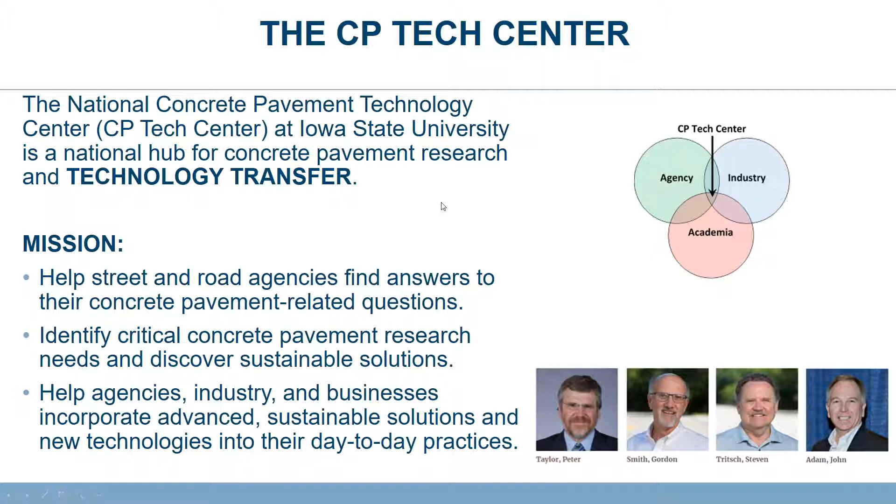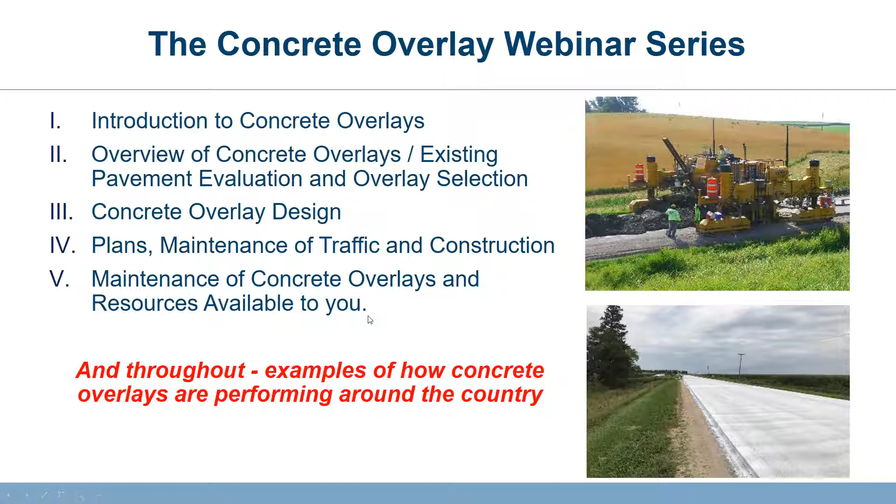Today, Dr. Taylor and Dan King will join us to present an introduction to concrete overlays and an Iowa overlay story that illustrates one instance of expanding use of concrete for pavement rehabilitation or resurfacing needs throughout our nation. In the coming weeks, we will cover an overview of concrete overlays and the information needed to evaluate and select an overlay. We'll talk about concrete overlay design, plans, maintenance of traffic, and construction. And finally, in our last session, we'll focus a bit on maintenance of concrete overlays and cover some of the resources that are available to you. Throughout the webinars, we'll be offering examples of how concrete overlays are performing around the country.

The pavement system in the US was constructed, but the bulk of it was constructed and set up many years ago, and it is getting tired. Some of it's pretty old, some of it's pretty beat up. Budgets for maintenance have been very limited for the last few years.

As we're starting to think about asset management, we're starting to realize that if we let the condition of a pavement fall too far towards the floor, the actual cost of restoring it to some sort of usable state can get very expensive very fast.

Think about the vehicle you drive. Why is it that rental companies dispose of their cars after 30,000 miles? It's because the maintenance costs start to get too heavy. In my own vehicle, it's more cost effective to spend money on it and keep it in good condition rather than let it get to be really bad.

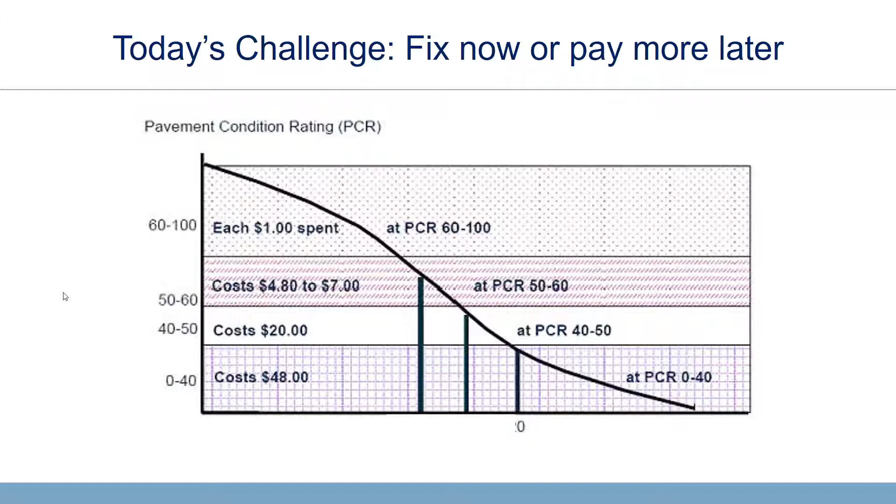So as we think about how to maintain and restore the condition of our pavement infrastructure system, we have a number of options. Our roads are getting old. We can toss them out and start again.

In some ways, this is what we do with a lot of aspects of our lives. In a plastic, disposable community or culture, it's part of the way we think about a lot of stuff. But does that make sense when we're looking at pavements?

The benefit of this approach is that it's a long-term solution. We've got 30, 40 years out of the existing system. Toss it out, throw it away, put in a new one, and we'll get another 30, 40 years.

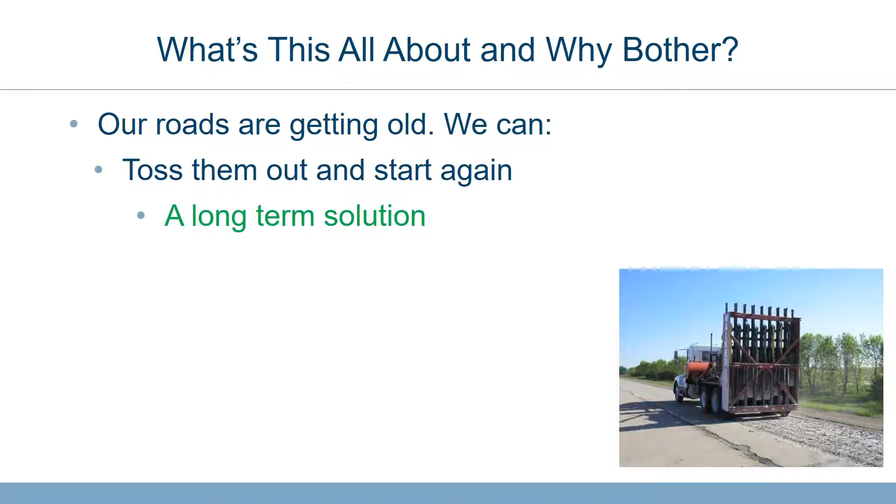But there are some fairly significant negatives. What do we do with all of that material? If you think of the quantities of concrete, asphalt, rock, sand, foundation material, the volumes are huge.

It's also not very sustainable. It burns a lot of energy, a lot of diesel, a lot of carbon dioxide footprint to pick them up, break them up, get them out of the way. And again, then we still have the carbon footprint of putting the new system back down.

This also takes time. It's probably the longest and slowest approach to doing any form of rehabilitation. The photograph is actually taken from a stretch of highway near where we live right now.

And it was on the road that we used to go on at least once every month, heading up to visit my daughter in college. We spent months beating up the old road, digging it out, getting it out of the way. The system was shut down, basically, or constricted for months as we went through the whole process.

And so the social impacts are huge. The environmental impacts are huge. The costs are huge. So in terms of sustainability metrics, this is probably not the best approach that we can take.

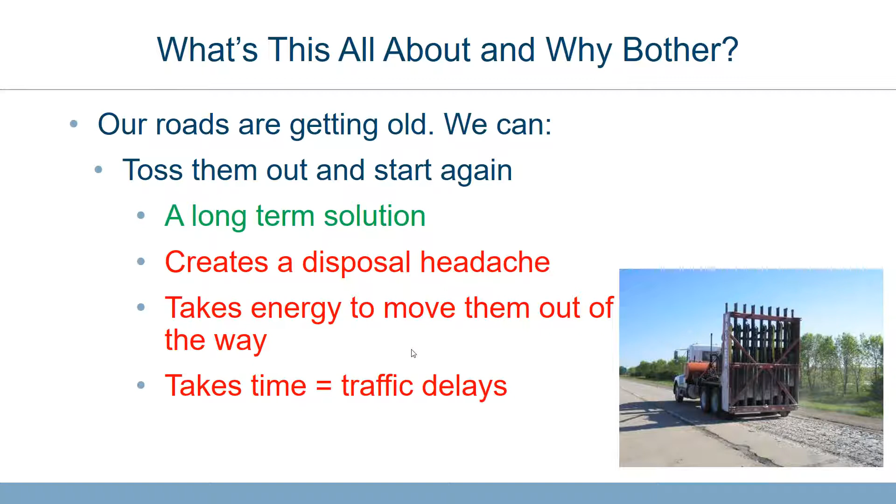So the next alternative that we can think about is patch them, slap a bandage on them, and do something quick and dirty. Now the benefit of this is that it's very little amount of material, energy and traffic impact is low. You can get in, do it overnight or over a day or two, and get back out.

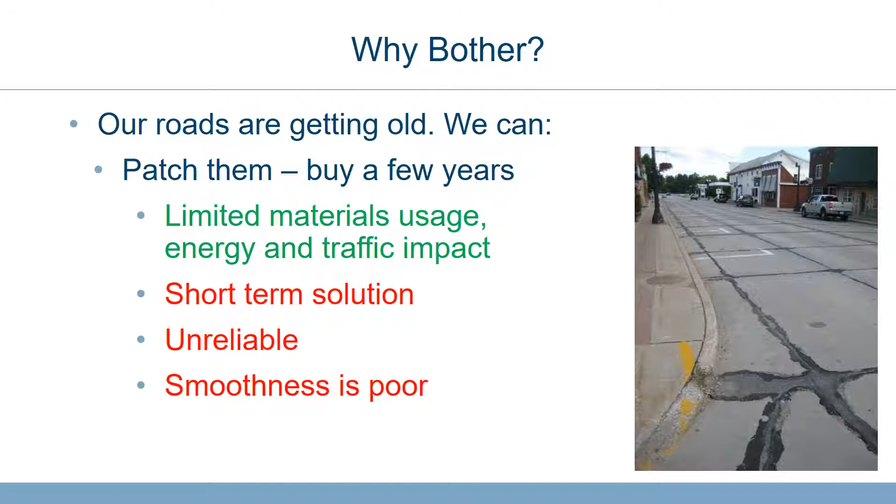The negatives: it's a short-term solution, it doesn't last very long. It's pretty unreliable. Smoothness is poor, aesthetics is poor. So again, there is some positive, but there are also a lot of fairly significant negatives.

So the third alternative we can think about, and the one we're going to spend the rest of today looking at, is the idea of an overlay: put another layer on top of the existing system.

The benefit of this is that the equity that we have in the system that's on the ground, we keep. It doesn't get disposed of. It's not wasted or thrown away. We're taking full advantage of that system regardless of its condition, and I'll talk about that in the next few slides.

This seems to be the best way of maximizing our sustainability benefits, in that we're putting down as little material as we needed. We're not throwing away much material. The other benefit of this approach is that we can actually design it to deliver whatever lifetime we want out of it.

If it's just a case of buying a couple of years until the next planned maintenance cycle or next replacement cycle is budgeted, we can design and deliver a system that's going to last 5 years and probably not much more. The alternative is this: if we want this to be a long-term system, we can also do that, and we can make it serve for another 20, 30, 40 years as needed.

The downside of this is that in urban environments, the elevations, connections, sidewalks, manholes, bridge clearance - those can be a little tricky, and so we do have to stop and think about these a little bit. When we're out in the middle of an Iowa cornfield, this is really easy. But if you're in an urban setting, this does become a little bit more of a challenge.

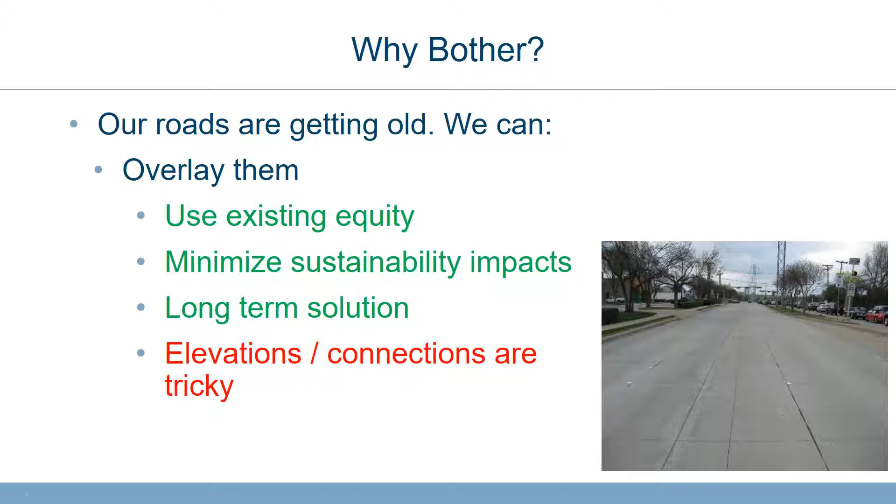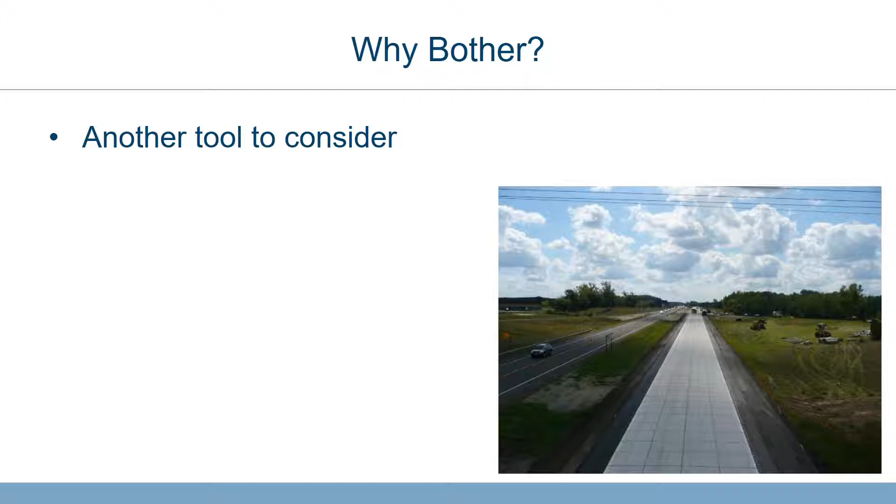However, this has been thought through. We do have suggestions on how to address this, and I'll touch on these today and go into more detail on them in 3 or 4 weeks' time. So the message we're really just trying to put out there is that there are occasions when overlays may not be ideal, but for the agencies in the audience, this is just another tool in your toolbox for you to consider as you look at your maintenance issues going into the future.

So how do we classify overlays? This is a topic that's still evolving. There is a lot of debate. There's been a flurry of emails circulating among those of us involved in the community over the last couple of days about how do we stop and think about and design overlays and the different systems that we may want to choose to do.

The first question, as an agency, is to ask yourself: well, what's already there? Is it asphalt or concrete or a composite? That's pretty easy to answer - go outside and kick it. And that's your first sort of bifurcation point in your decision tree.

The next question is to ask: is that existing pavement in reasonably good condition? Are we doing this in order to just elevate it a little bit? Are we trying to improve traffic access? Are we trying to do a little bit of widening? If the system is in pretty good condition, that's a different approach than if the system is badly beat up and is looking pretty sad.

Now, generally, the way that we're approaching this is that pavements that are in pretty good condition, you can consider a bonded overlay, meaning a system that is glued to the existing pavement. An unbonded system goes on top of systems that are in pretty sad shape. The difference then is that in a bonded system, the old pavement becomes part of the structure. In an unbonded system, the old pavement is part of the foundation. And that has implications on the way that we design them.

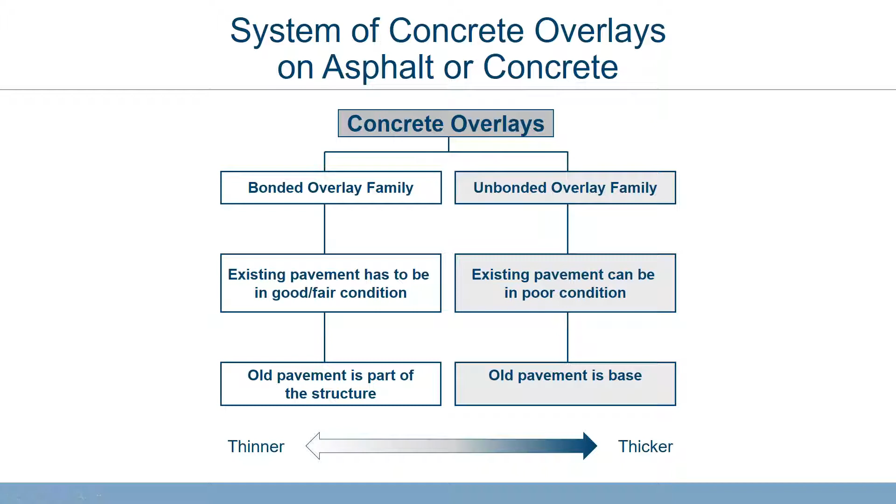Now, it's a pretty simple way to think about it when we talk about concrete on concrete. It is a little bit blurry when we start talking about putting concrete on top of asphalt. Now, the fundamental science behind this decision process is that if you have two different systems, two different layers, stressing - one that is not bonded to the one below can end up with fairly high stresses both at the bottom and the top, if we treat it as an elastic system sitting on a flexible medium. There is no connection between the stresses between the two, there is no shear between the two.

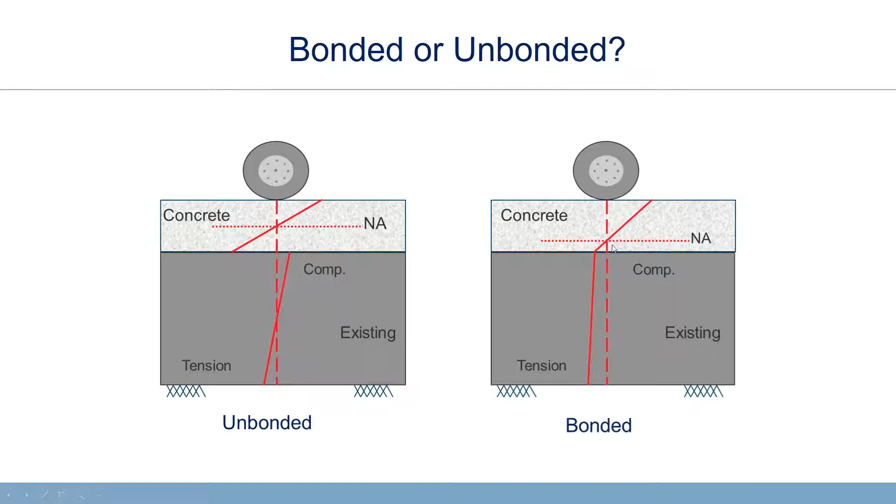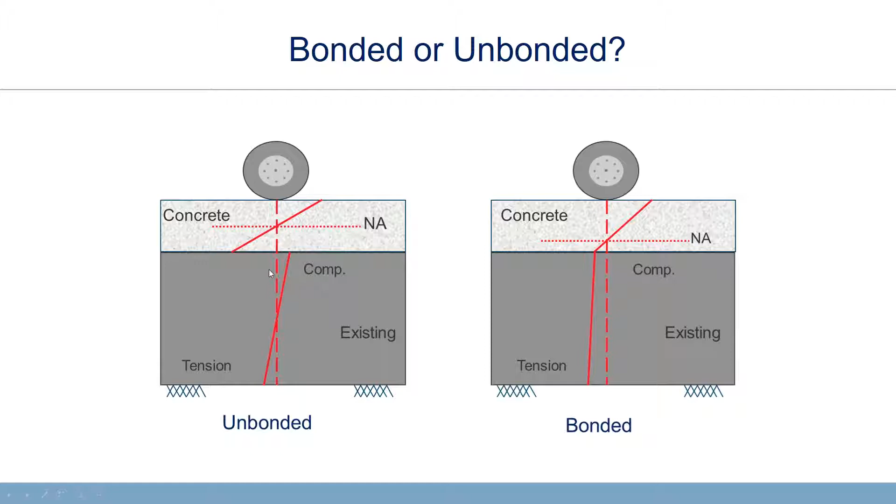Now, if we put a bond in between so that these two systems are working together, you can see that the stresses are actually reduced and some of the load is transferred into the existing system. That means fundamentally we can reduce the thickness of this concrete overlay. So there is an implication - are we putting it on good stuff or on bad stuff - does affect how thick the layer has to be, or how thick that new layer has to be.

The other thing that we have to think about then, whether it's bonded or unbonded, is what do we do about the interface between the two layers? If we're doing an unbonded system, that new layer must not bond to the existing concrete. And the reason we get excited about that is that generally any cracks or joints that are in the existing system will reflect through into the new layer unless you can provide a separation. Again, unbonded systems tend to be put down on poor condition and are slightly thicker.

Now, when it comes to asphalt, some bonding is okay - we don't take any special activities to try and separate the two layers. So some bonding, this is where I said it becomes a little blurry in these definitions, but this is still as good a way of approaching or classifying these systems as any we have at the moment. On a bonded system, again, because we're decidedly or deliberately depending on the load carrying capacity of the existing system, that bond has to be there - we have to be able to transfer shear between the two layers.

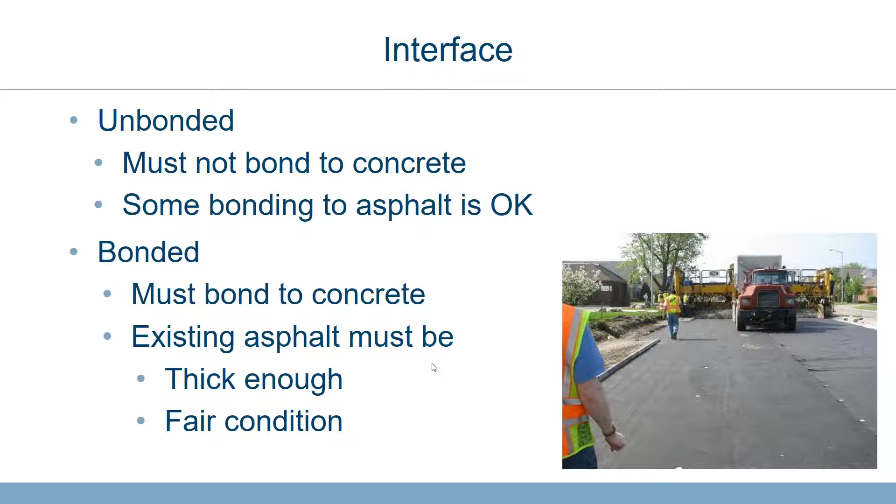As I said, we among the community are still discussing and refining ways to help simplify the way to think about these, and this will be adjusted in future editions of our publications. But this thought process is still reasonably valid, and some of the details on how it impacts design will be discussed in a couple of weeks' time.

Expected service life basically depends on the thickness. Thinner overlays generally last a little bit shorter life. 15 to 25 years have been recorded, and Dan will be talking about that towards the end of this session. If you go in for fairly thick sections, you can easily get more than 20 years out of an existing pavement. In the photograph, Grundy County, built in 1978, is still looking very sweet. Now, admittedly, that's a rural roadway and doesn't see a lot of traffic, but it's there, it's looking good, and it's carrying that traffic perfectly satisfactorily.

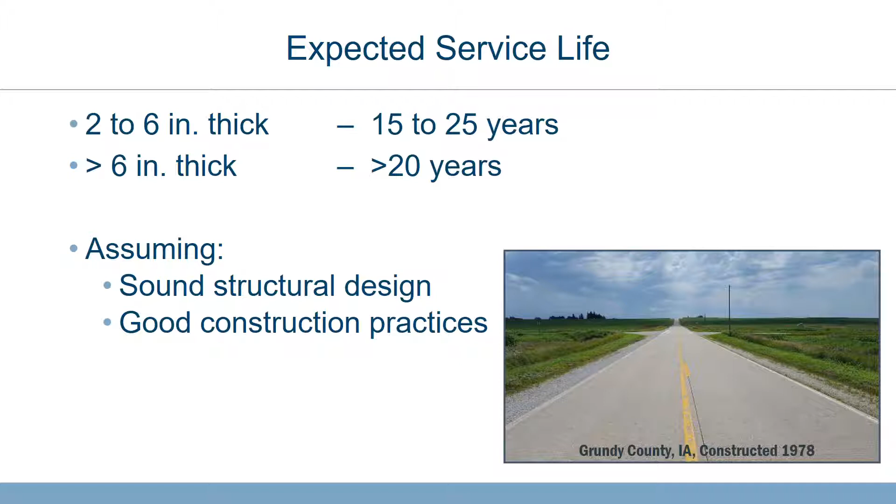Now, again, all of this depends on whether or not the design was appropriate, and it also depends on how well it was built. So again, there is a need for us to do good engineering. It is tempting to say, let's make it simple, let's apply a few global rules of thumb. And I'm not convinced that is ideal. We are engineers, we should be applying engineering principles to the systems that we're trying to work with, taking the best advantage of what we have on hand and maximizing the efficiency of the systems that we're going to be putting down.

So the big picture. What are we doing? First trick, get out there and have a look at the existing pavement. What sort of condition is it in? We've got guidelines, and again, we'll be addressing this in more detail next week, but look for damage, look for raveling, cracks and joints, look for faulting, look for indications of damage in the foundation layer. What is the condition of the pavement that is in place? If it's really bad, we need to be looking towards a thicker system. If it's pretty good and we're just doing a slight improvement, then we can look at a thinner system to go on top.

Having got that information, then we can start talking about the design approach. How do we decide how thick to make this new pavement? Also, again, when we're sitting in an urban environment, start thinking about how do we do the connections to existing driveways, curbs, and that sort of thing. If needed, get in there and do some grinding and repairing. I've talked at length about how the existing system has to be in pretty good shape.

Now, one alternative may be, and I've seen this happen, we did a site visit last year to a city where a limited amount of repair work took it from being pretty sad to being in a position where it was ripe for a thin bonded overlay on top of it with a fairly small amount of grinding and repair. And again, the decision on this has to be economically based, along with taking into account things like traffic, time, sustainability, those sort of things. But a grind, and if there are a limited amount of flaws, filling those up and repairing them is a necessary step.

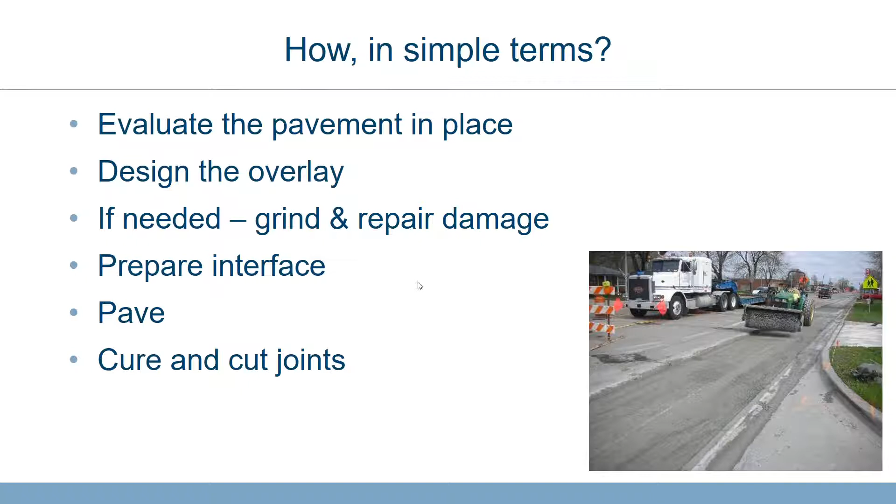We prepare the interface. I'll talk about that in a couple slides. Do the paving, and then do the curing, cutting the joints, striping, and get it back open. It's not a very complicated procedure. It's been done in all sorts of settings and very successfully.

How do you design the thickness? There are all sorts of tools out there. The ME Design tool from AASHTO includes a module developed by Julie Vandenbossche. Pavementdesigner.org, the PCA, ACPA, NRMCA program, has a module in it. Some people revert to AASHTO 93, and there is a commercial software design package called OptiPave. All of these tackle the problem in slightly different ways, and they're all appropriate in certain settings. Again, we'll be providing a lot more detail of how to tackle that in 2 weeks' time, and I'll move on quickly before I get myself into trouble.

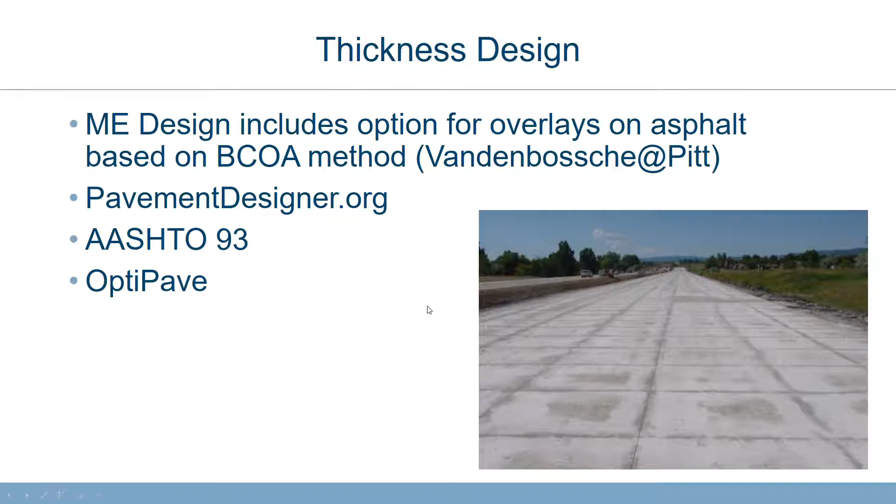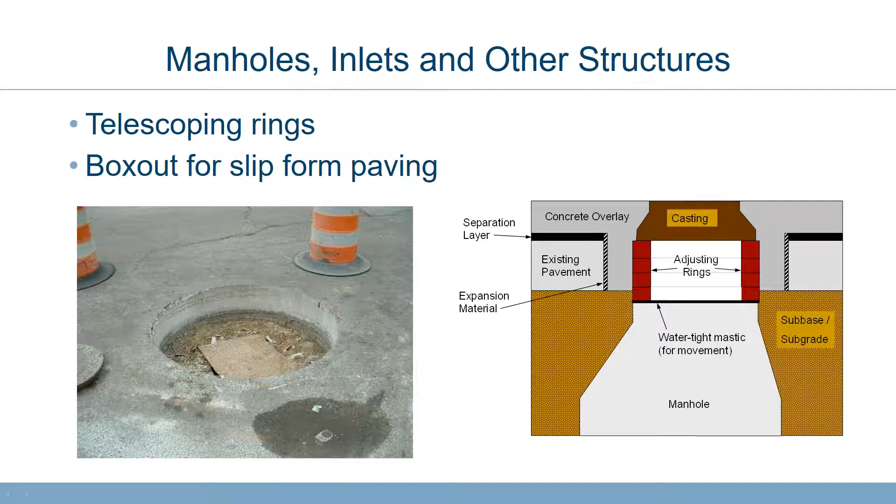What about things like manholes and box outs? Again, guidance and information is available. It has been done. We have the tools available to help us do this sort of thing. If you have a manhole, putting some adjusting rings into it will allow us to put another layer on top, put a new manhole on top of that, and keep on going. So these things don't make it impossible. It just means we do have to stop and think about it a little bit.

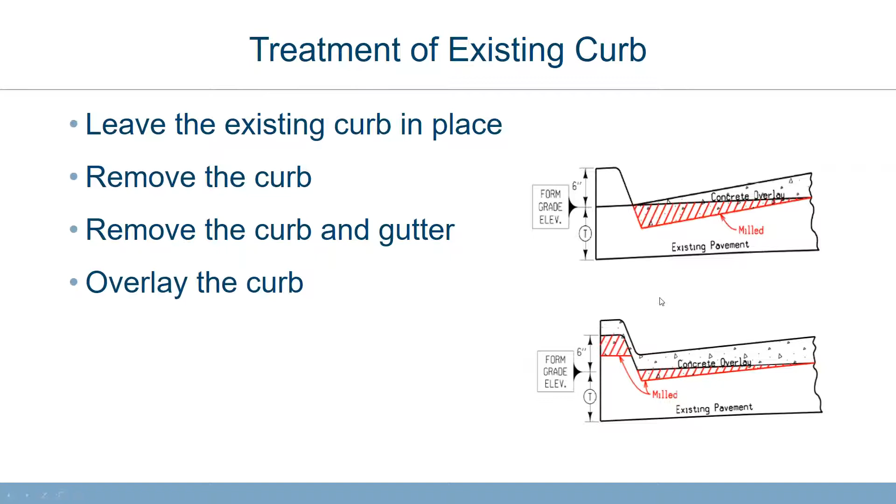What about the curbs? There are several ways we can tackle this. We can leave the curb in place and do a little bit of milling. We can remove the curb and replace it. We can remove the curb and gutter and replace that, or we can just build on top of the existing curb again. It depends very much on the system and the alignments and the needs that you have. And again, maybe the condition. If the existing curb is shot, you may not want to keep it. So again, good engineering, but the guidance on how to think about this is available.

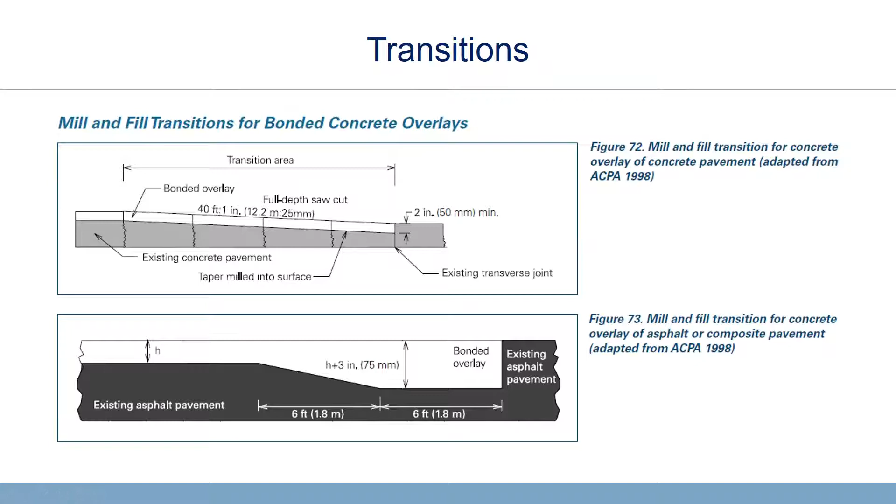Transitions, how to go to meet up with other lanes if we're not overlaying the whole system. What about shoulders? So again, some guidance is available on how to do those sort of things.

When we talk about doing some repairs and surface preparation, again, if you have deteriorated joints, we may have to fill those up. If there is spalling, we will have to patch those. We do have to ensure that if the existing system has load transfer, we have to put that back because, again, the whole design is built around the concept of loads being shared between adjacent panels. And then we also need to look at the surface.

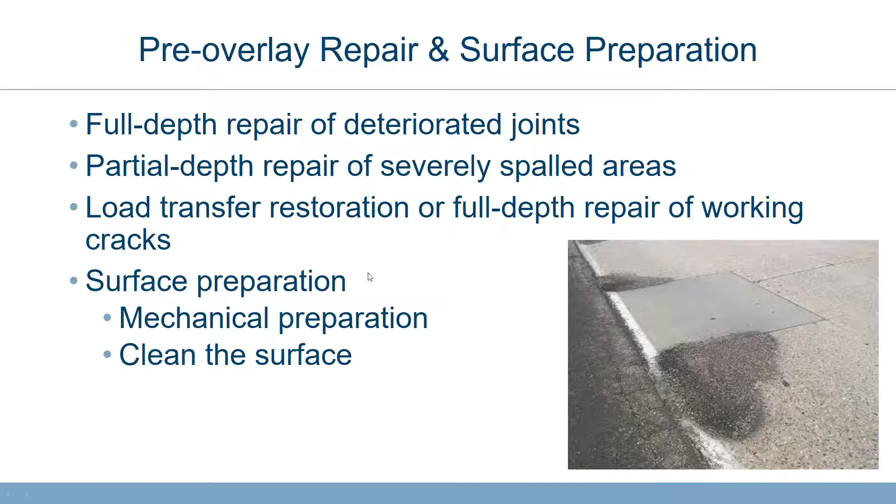Then we look at the separation layer. If we're going with an unbonded system, that separation layer is absolutely critical. And its purpose is to, again, prevent cracks from reflecting from the old damaged pavement into the new layer. It also provides a bit of a level surface for the new concrete to go onto, and it also helps to provide a little bit of cushion.

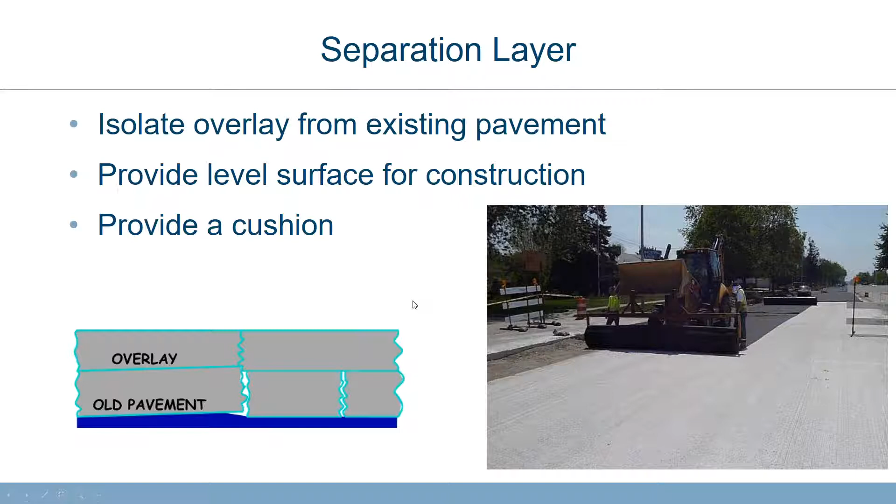You can see from the image on the left that if there is some faulting or continued movement of the old pavement, it's not going to cause any damage in the new surface layer on top of it. So again, that slight cushioning, the ability to absorb some deformation, and to provide a shear break between the two layers. If you're going to do an unbonded system, you have to do it, and it's important that it's done correctly. How do you do it?

Two different ways. One is to throw down a layer of asphalt, typically about 1 inch of fresh asphalt. It acts as a relief layer. One of the advantages of taking this approach is that if you have fairly significant faulting in the old pavement, this can help absorb some of that faulting and prevent that from showing through onto the new pavement. The thing to watch out for is the risk of stripping of this new asphalt layer. And so it is absolutely critical that if you're putting an asphalt down, it has to be well drained. And that drainage means it's got to go somewhere.

I remember seeing a pavement a few years ago where it was a mill and fill, had ground out some of the old material, put an asphalt interlayer in, put new concrete on top of it, but the water had nowhere to go. And so the asphalt had stripped, disappeared, and now the concrete had nothing to sit on. And we were able to make the new concrete overlay jump up and down. You could get little spurts of water coming out of the joints because the asphalt had failed, particularly under heavy truck traffic.

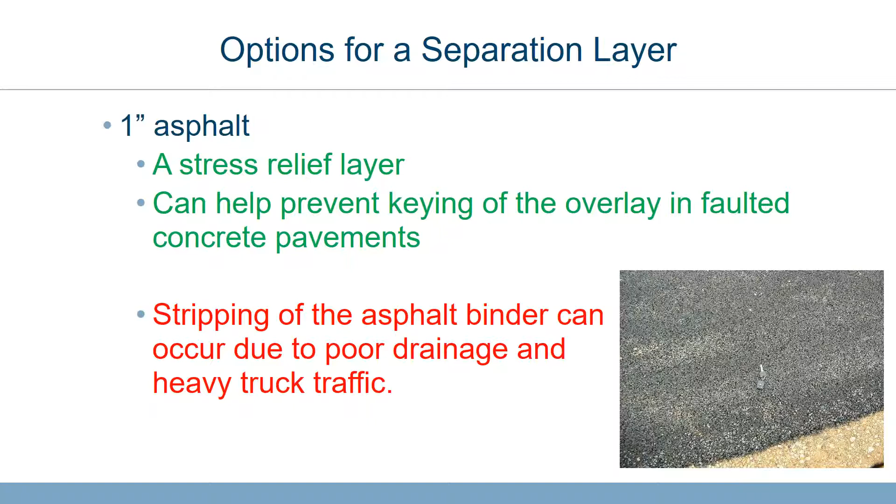And this is not surprising. I remember close to 40 years ago, the first transportation lecture, sitting in second year college, the professor stood up and said, water is the death knell of any pavement. This is not new information, but we do have to bear it in mind as we're designing our systems. If water gets through the joints, water gets under the pavement, it's got to have somewhere to go. We've got to give it an outlet.

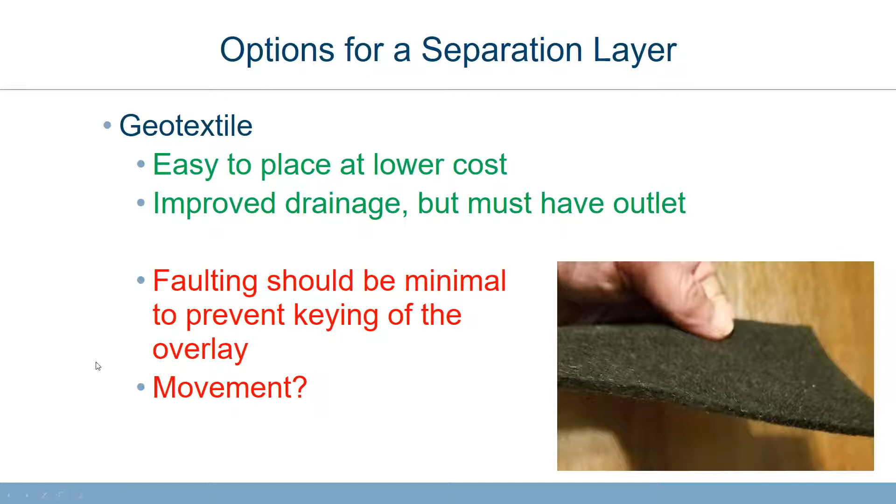What about the concrete? What are we going to build these overlays out of? Everything that you've already built, your existing pavement systems. It does not have to be a special concrete mixture. In the same way that we suggest for pavements in general, control the water cement ratio. The number we like to recommend is in the order of about 0.42. If you're in cold states, enough air: Super Air Meter of about 0.2, 0.3, total air content above 5% behind the paver.

You must have enough supplementary cementing materials in the mixture to deal with the environmental issues: alkali-silica reaction, sulfate attack, chlorides, oxychloride de-icing salt attack. And also because SCMs help us with long-term permeability, with strength, and with sustainability, since they have a lower environmental footprint. Let's take advantage of those.

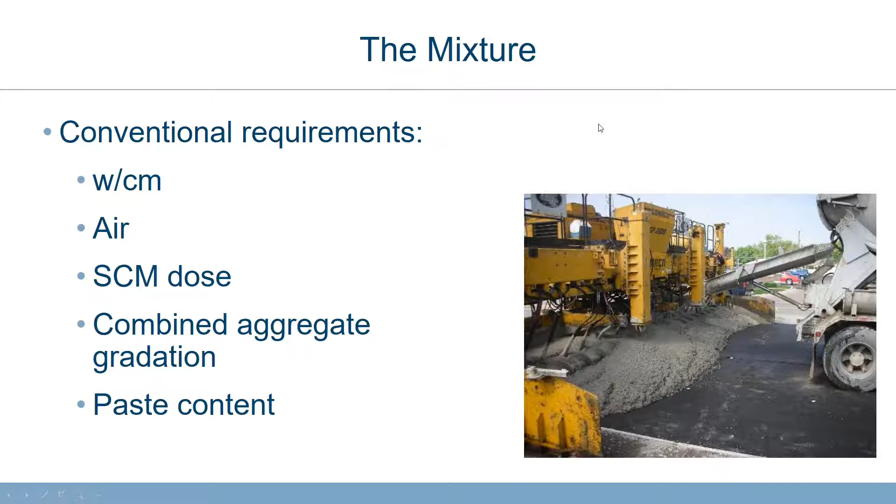We're also recommending for all pavements, overlays and others, control the gradation of your aggregate system. By doing that, we can minimize the amount of cement we put into the system. And that's a good thing from a carbon dioxide point of view, from cost, from shrinkage, all sorts of benefits from putting in enough cement to get workability and properties, and no more than that. Excess cement is a waste of money. So the mixture is nothing different from an ordinary concrete pavement.

What about joints? How big do we make our panels? It depends primarily on the type and the thickness. Generally, for bonded systems, we have to go with smaller panels because we're putting in thinner panels. I've seen them as small as 2 foot, and those look pretty crazy. There's one near where I live, and the joints are starting to ravel out from oxychloride attack. It's not a very pretty drive. It's 15, 20 years old. It's lasted remarkably well. But maybe that was a bit extreme.

One of the issues with smaller panels is, from a design point of view, it's always a good idea to keep the joints out of the wheel path. So part of the design consideration is, where are your joints going to be? The other key point is that if you're doing a bonded system, you have to cut full depth, particularly if you're cutting over an existing joint. You have to match up the new joints with the old joints so that you don't get reflective cracking. And you have to cut it full depth because if you don't cut it all the way through, then come summer when everything starts to expand, it hasn't got anywhere to go. And so the risk of blow-ups goes up pretty high.

On unbonded systems, it's all tied to the thickness of the slab. Typically, if you want a rule of thumb, 6 by 6 by 6, 6 inches thick, 6 feet by 6 feet in dimension, has been used in many locations and very successfully. Saw cut in this case can be T/3 because we have separated the system from the layer below and we're less concerned about that differential movement. So standard T/3 saw depth can be perfectly satisfactory.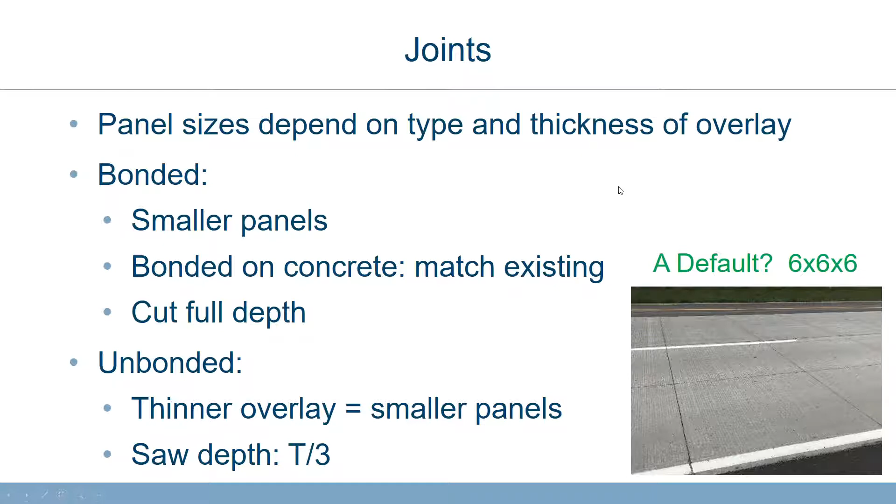In thicker systems, the rule of thumb is, if the slab is less than about 6 inches, you don't need dowels or load transfer in the new layer. If you're going bigger than 6 inches, then you probably do need some sort of load transfer devices. The point we're really highlighting in this slide is that if you're using dowels, pay attention to how those cages are secured to the existing system. We have seen several cases where the concrete, as it's being dumped and pushed by the paving machine, has moved these cages a long way, and then they're not doing us any good at all. So nailing these things down is a little more challenging when you're nailing into concrete or asphalt, but it has to be done properly.

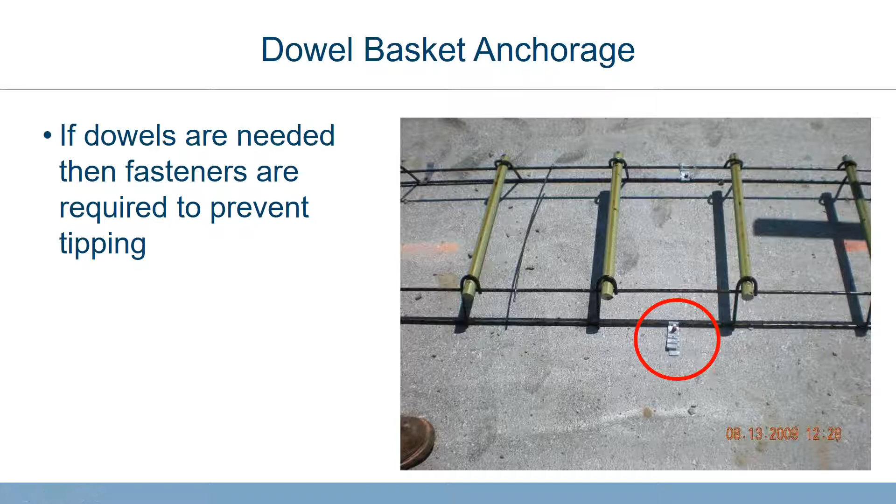Do we do this under traffic or do we divert? Yes, we've done both. This is taken from a construction site in Iowa. The thing to note is that safety does become an issue. In this case, there was a 24-hour pilot car, so traffic was controlled one way.

Alternating over fairly short intervals with the pilot car, going backwards and forwards. The pilot car kept speeds down to about 25 miles an hour, primarily for the safety of the construction crew. It did limit the amount of traffic that could go through this area. In fact, a lot of the local farmers chose to divert and go around on other county roads, and the loads on those roads went up fairly significantly and irritated the county engineer quite a lot.

Space for the construction crew is important. So when you're doing your design and detailing, think about whether you have enough room. Do you have wide enough shoulders? If the traffic is going to ride on the shoulder, will they be able to get by? Is there enough space?

The other issue we found was that we were limited because of the pilot car to a 6-mile staging, which ended up with a fairly complex system of when we could pave westbound and eastbound, in fairly short sections, on what was I think a 30-mile reconstruction job. But it can be done. This one was pretty successful, with no real issues.

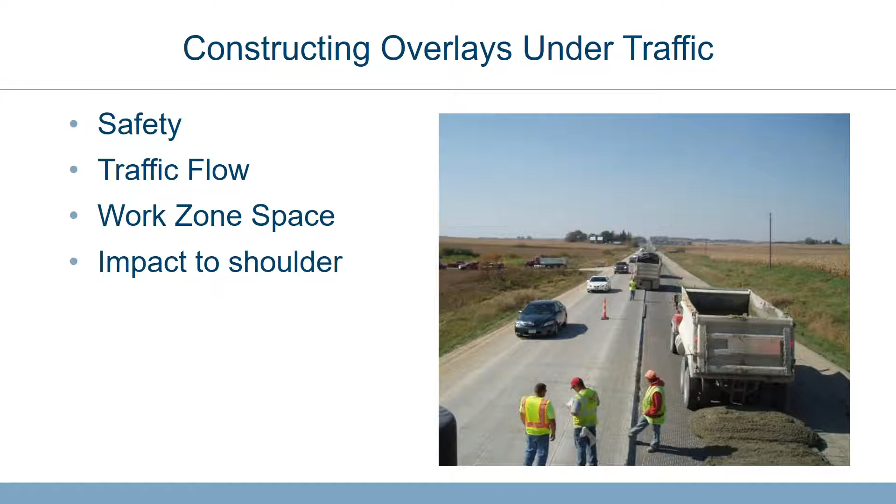One of the innovative tools that has helped a lot is this idea of stringless paving. If you go back to this image where we did construction under traffic, you'll notice there is no string line. We were able to put in a far tighter work zone because we didn't have to have an extra couple feet for the string line for everybody to trip over. This is because of stringless paving.

Having predetermined 3D models of the whole system, with GPS and total station controlled systems—you can see the masts on top of the paver here talking to the GPS—it's all computer controlled and has been pretty effective. What we found is that most contractors who have used the system on a trial basis have discovered their smoothness goes up, which means their ride bonuses go up, so it's become cost effective for them. It does take a little more effort on the front end to get the design and models in place, but the expertise and tools are available, and guidance is readily available to the consultants who need this information.

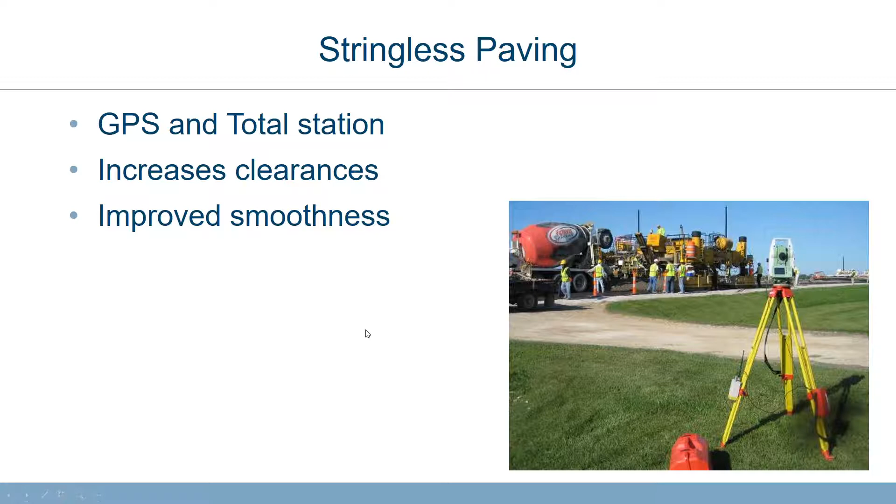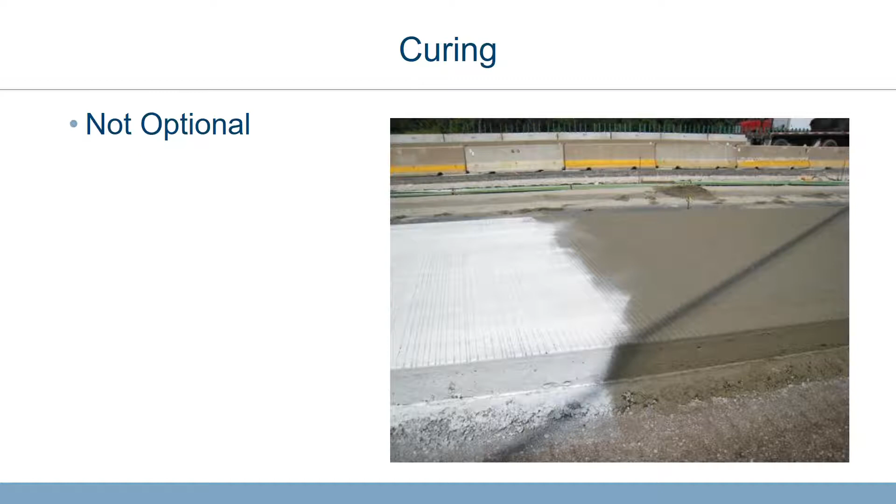Having put the pavement down, let me jump on my soapbox and rant about the need for curing. Concrete is a material that has to hydrate. You have to keep the water inside it as long as you possibly can to get all the benefit out of that expensive cement we're putting into the mixture. So curing is not optional. Keep doing it.

What about some new and innovative ideas that we're looking to in the future? One of the ones that we built last year was to look at the idea of fibers.

A county engineer agreed to let us put down an unbonded overlay with a far higher dosage of fiber than we usually do. His tradition, for the bulk of the project, was 6-inch panels, 12 foot squares, with a geotextile interlayer and unbonded pavement, and he used 4 pounds of structural synthetic fibers for the whole project.

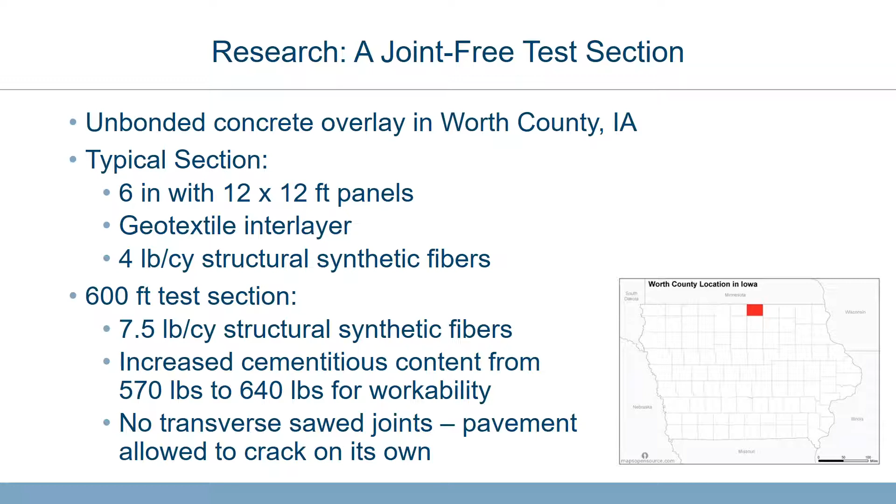For a short 600-foot test section, we doubled the amount of fiber. We had to increase the cement content slightly to keep the workability of the system alive, but we did not cut any saw joints in that 600 feet. We didn't cut any transverse joints. The longitudinal and shoulder joints were cut as usual, but no transverse joints.

After 11 days, we found that the cracks had formed at about 70 feet spacing. This was last fall. Dan went back out there fairly recently, and I think we're running at about the same number of joints. Some of them have opened up a little bit, but the county engineer still seems to be pretty happy with the system.

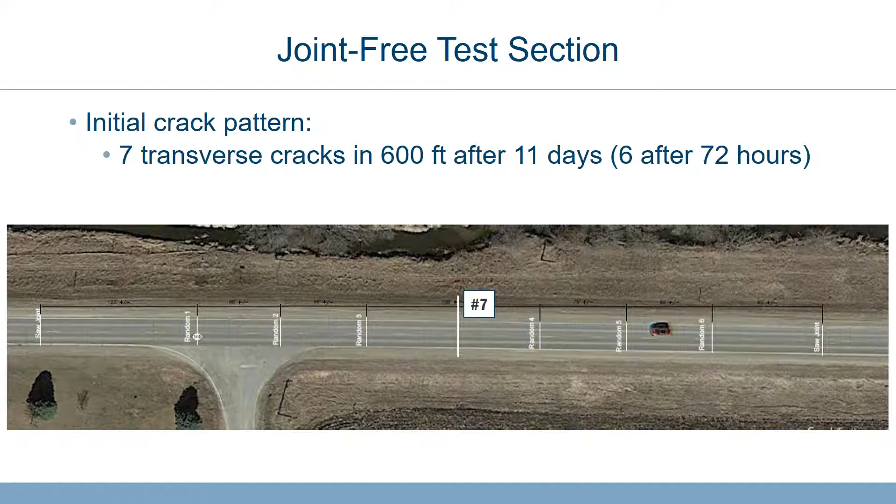It saved us money on the saw cutting, and it seems to be performing pretty well. We'll be watching this over time to see how it copes - we've been through a winter, and now we need to go through a hot season and a wet season to see what happens over time. But interesting little experimental section. The fibers certainly helped. What happens with the joint-free section, who knows? We'll watch that one. We'll report it as time goes on.

The other technology that I'm pretty excited about is internal curing. This is the idea of putting lightweight, fine material into the concrete that are pre-saturated. They help provide water to the hydrating cementitious system over time. The benefit is that theoretically we would reduce the warping, how much movement is happening in the slab due to differential moisture profiles.

We've built 2 sections, also in Iowa, in 2 different counties. We put in quarter-mile sections with internal curing. We've been monitoring these for the last 18 months, and the data so far seems to be indicating that the amount of warping or vertical movement in these sections is far lower than the control sections, which were built using traditional mixtures.

The advantage of this is that I was talking earlier about the need to keep the saw cuts out of the wheel path. Sometimes we've made the compromise of saying, in order to get the joint panel sizes right, we've had to make the panels a little bit thicker. If we use internal curing - and again, this is experimental, it's still pretty theoretical, but I think it's going to work - with internal curing we can go with thinner sections, still keep the joints fairly far apart, and still keep the joints out of the wheel path. This is a win all the way around, because fewer joints means far less maintenance over time.

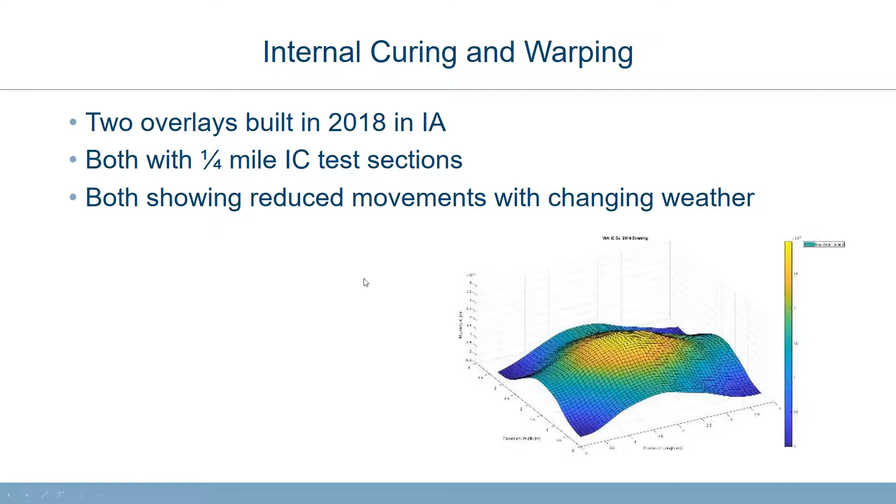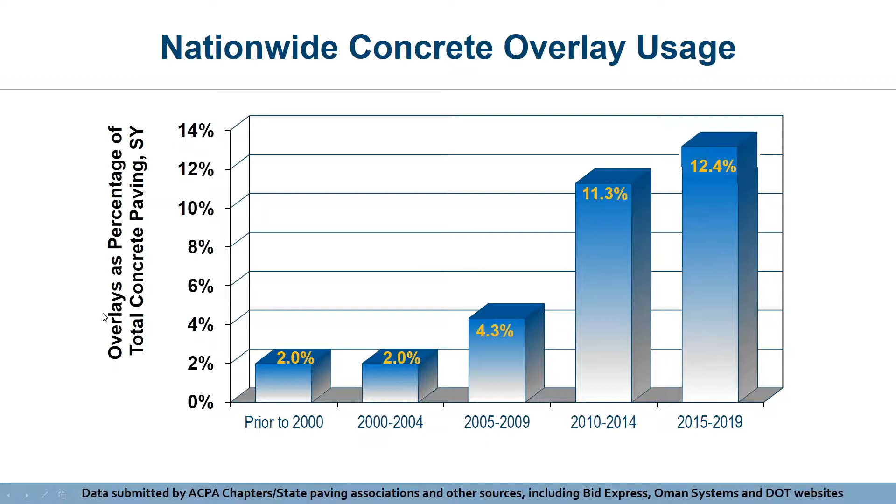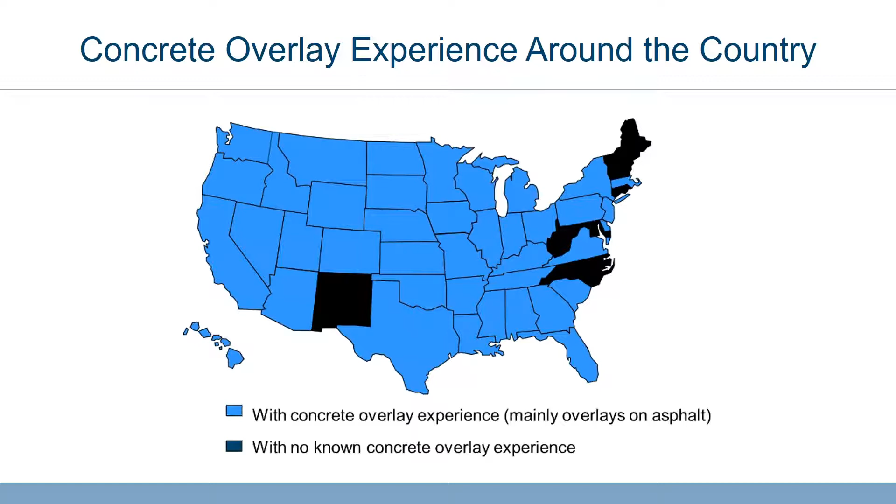The overlay market has been growing pretty consistently over time. About 12% of pavements built in the last couple of years have been overlays. So it's been a real strong part of the industry. It's been built almost nationwide. A couple of black spots of people that haven't, or as far as we know, haven't played with overlays - if anybody from those states is listening and can prove us wrong, I'd be happy to learn. If you need any help thinking about this stuff, that's what we're there for, to provide you with the tools and resources to investigate this and build it into your toolbox.

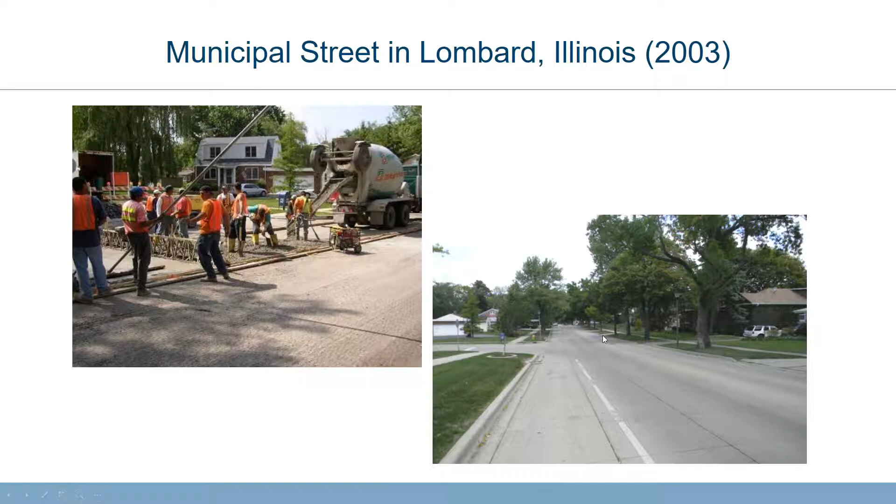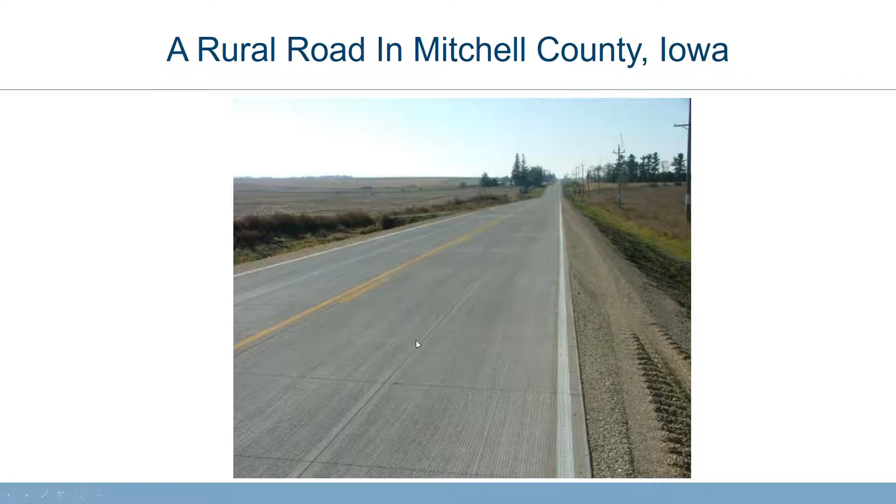Rural Road in Mitchell County, Iowa. This was also an experimental section, the first time we put fibers in, with different dosages and different panel sizes. The county engineer is very happy with this. And it's not just highways - airports have been built too. An executive airport in Charleston has an overlay on top of it. As far as I know, it's working pretty well.

With that, I've done my speech. Dan, you're up. You've got 15 minutes to sing and dance. You need to unmute yourself. There you go.

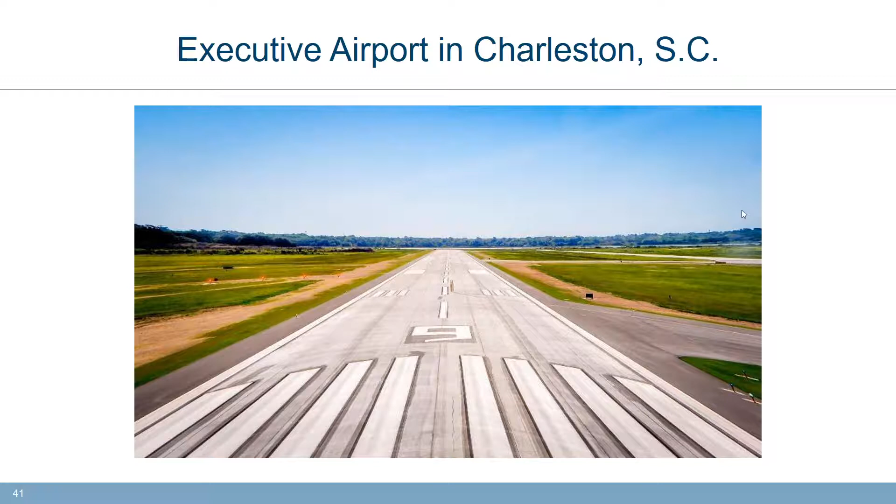Good afternoon, everyone. I'm going to talk a little bit about the experience that we've had in Iowa with concrete overlays. As Gordon mentioned at the top, as part of the series, different states are going to be sharing their histories and their experiences with concrete overlays. And Iowa's a really great place to start with this because it was one of the pioneering states in the development of overlay technologies. It was really the first state where concrete overlays saw widespread implementation. As you can see here, there have been over 2,000 centerline miles of concrete overlays constructed since, with some experiments early on, but really since the late 1970s, they started to become a regular part of the system here.

I checked, this is a slide from a couple years ago. It's about 2,250 centerline miles as of projects that were completed through 2019. And it is something that has grown over time. Over half of that total has been constructed just in the past about 15 years or so. And maybe the unique thing about Iowa is that, as we'll talk about, it's really taken hold and become a major part of our rural county highway system.

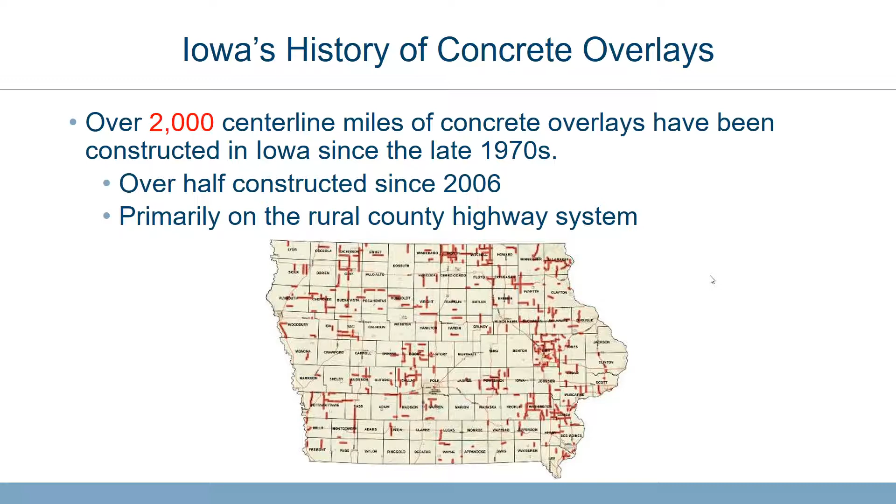So the majority of these projects, and kind of where they were first applied and really took off, is what we've seen on the secondary roads.

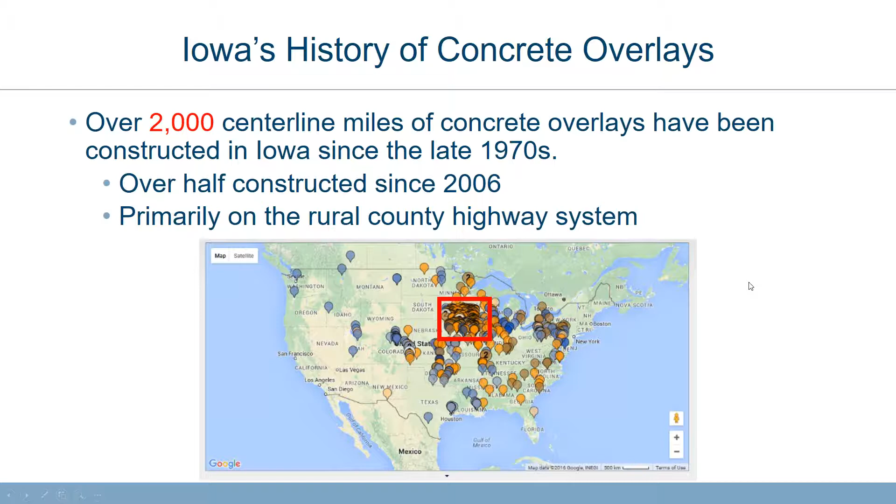This is the same map Peter just showed a second ago, also from a couple years ago. As more states have been building more projects, Iowa doesn't stand out quite as much as it does here. But if you're not familiar with where we are in the US, that's us, covered up by all the overlay projects there.

So the idea had been kicking around in engineers' heads for quite some time, but really it was the 1970s where you started to see, at least in Iowa, more experiments go down, and concrete over concrete is where that started. Quite a few of these were built in Iowa over the years. There are some tricky aspects to constructability when we talk about bonding concrete to existing concrete, especially older pavements. So we don't see too many of these projects anymore—maybe one comes up every couple of years—but that was kind of where things got started.

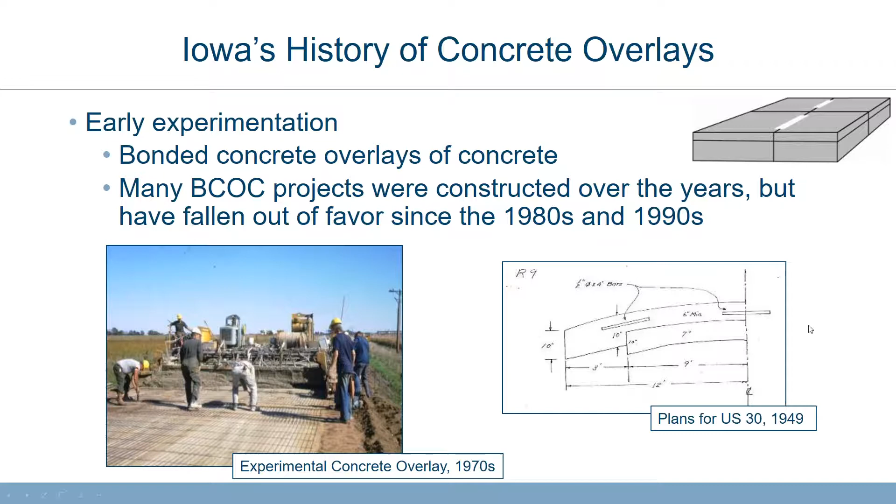The dawn of the more modern era for concrete overlays began when engineers started experimenting with what at the time they called white topping, which was just paving concrete over asphalt. That's basically how they came up with the name for that. It really was in the 70s when that took off, and county highways has always been in Iowa the main application for these.

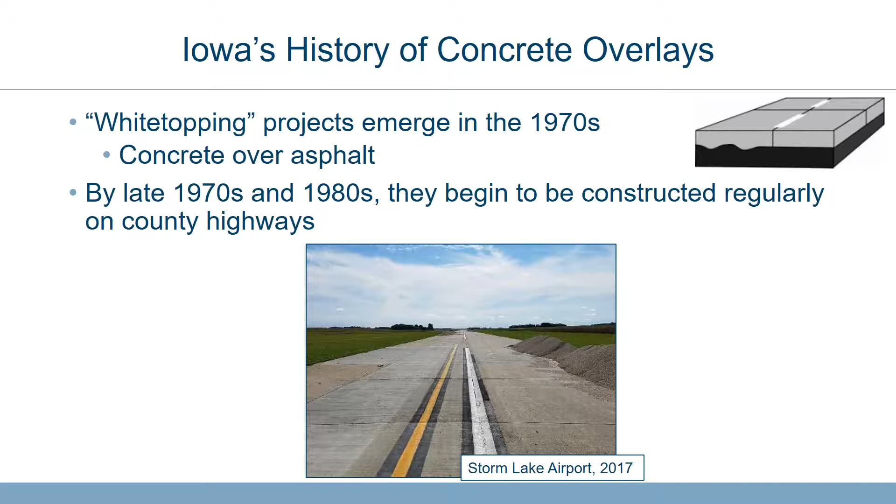That project is actually still out there in service. It's been patched pretty heavily over the years. When we were out there, we had a chance to walk this runway up and down in 2017 because it was closed for installation of subdrains—that's why you've got the material piled up on the side of the slab there. But it's kind of cool that that's actually still out there. When it's not under construction, they are still using that original white topping project for their main runway out there.

What these early designs tended to look like in Iowa was a 6-inch PCC over HMA. As Peter talked about, bonding is kind of an important consideration when we talk about overlay design, and it's a tricky concept sometimes, especially when you're talking about over asphalt. But with these initial projects that got built out, they didn't consider the bond.

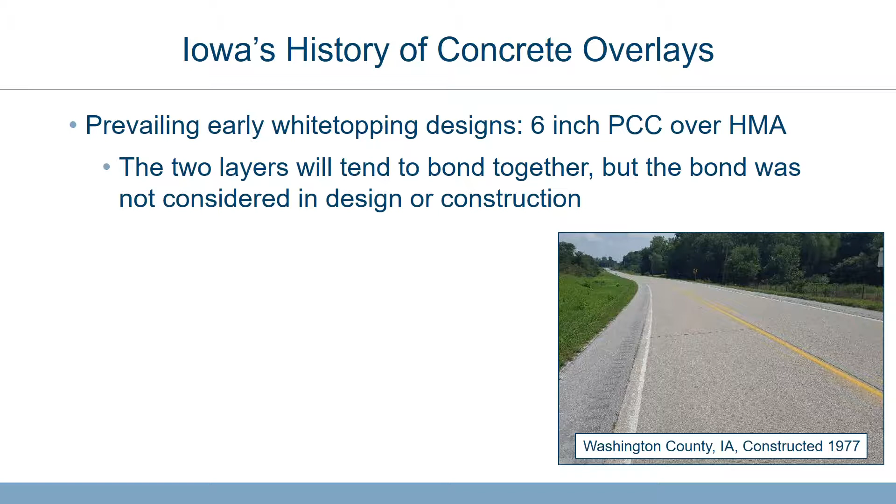They knew a 6-inch PCC design would be relatively appropriate for the traffic levels based on experience with full depth paving, so they figured 6 inches of concrete over asphalt should work fine too. Again, not worried about the bond or the condition of the existing pavement. They did find out pretty quickly that even though they weren't relying on any type of bond, the layers did tend to bond together, and that probably benefited the performance of a lot of these older projects. But that's where they got started.

About another decade later, at least in Iowa, they began to experiment with unbonded concrete overlays of concrete - putting down some type of stress relief layer over existing concrete pavements. They tried a few different things. I think there were some projects where they attempted to use maybe a slurry seal or a sand seal type of interlayer, but the asphalt interlayer became the standard. It definitely performed the best out of the different concepts that were tried.

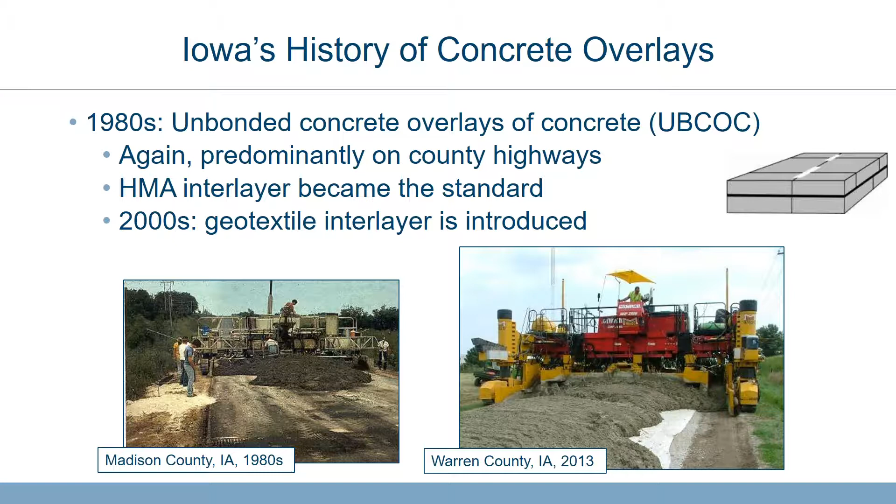And like Peter talked about with the geotextiles, now that we have the ability to try this newer technology, since about the late 2000s, that first decade, were the first experimental projects in Iowa. And then really just in the last 6 or 7 years, it's become a pretty regular feature of all the unbonded concrete overlays built in Iowa on an annual basis. Half of them still use an HMA interlayer, and half of them are using a geotextile. So it's a pretty regular application now.

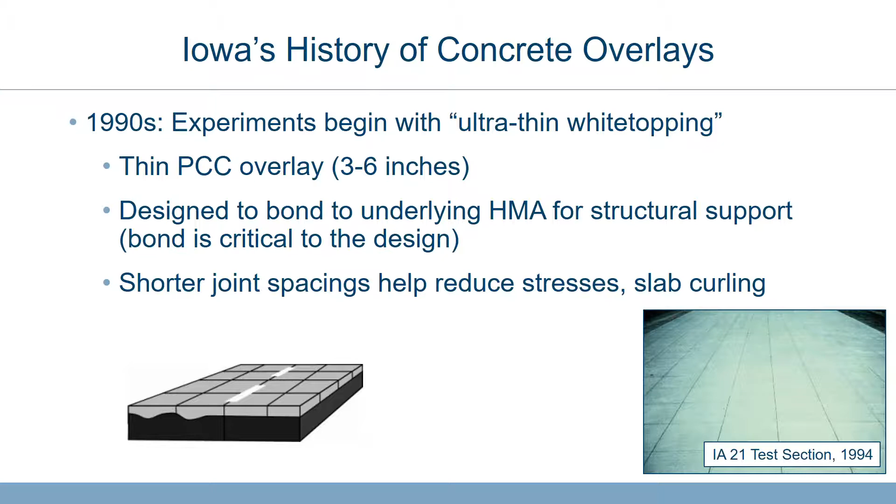So that was only 2 inches thick with those 2 foot by 2 foot panels. In this case, Peter already went over this, but again, you're designing it to bond to the underlying HMA for that structural support. That existing HMA is a critical part of the structural design of the overlay, having that additional structure bonded there. And then you have a pretty common feature of these, again, those shorter joint spacings to help reduce stresses and curling in the thin slabs.

Where Iowa stands today, with the long history of good performance that the counties have seen with a lot of their projects over the years, their preferred design is still to build a 6-inch concrete overlay with conventional joint spacing. They'll build unbonded over concrete, and they'll also continue building over asphalt. In those cases, the counties largely aren't designing necessarily to rely on the bond - it's probably more of an unbonded overlay, but they do still benefit, I think, from the bond that they get on those pavements.

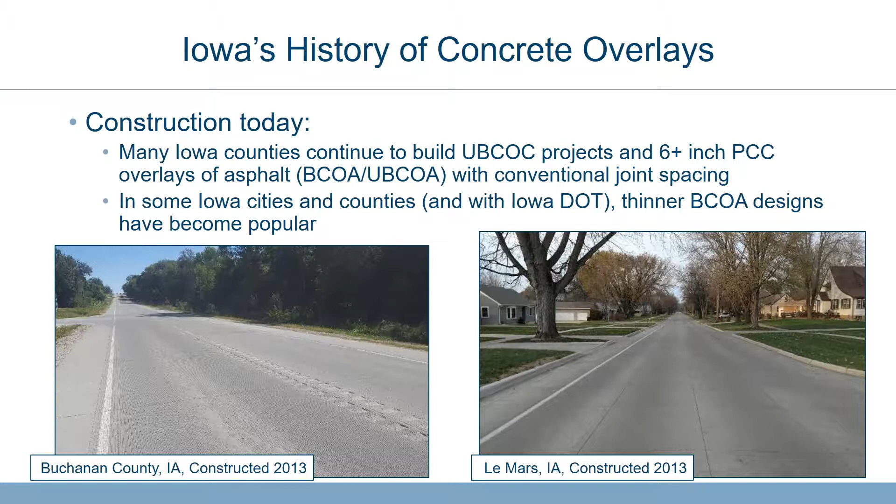And in situations, especially like Peter mentioned, in the cities where your elevation and grade constraints are a lot more critical, that's where we've seen a lot more interest in those thinner BCOA short joint spacing projects, like the photo you see on the right from the city of Le Mars. That's a city that's built, I think, coming up to close to a dozen different concrete overlays over the past 10, 15 years. So we've seen those, and Iowa DOT has built them both ways, applying them to a number of different projects as well.

So it's really been a successful application, and there have been quite a few projects built in Iowa, and again, in recent years, even more so than we had seen in the past. But despite this good history, we still had questions that we wanted to answer about this. We wanted to know what kind of service life can we expect if we're building a new PCC overlay, one of our typical Iowa designs, and maybe can we characterize a little bit better what type of performance we can expect from the existing overlays that are already out there.

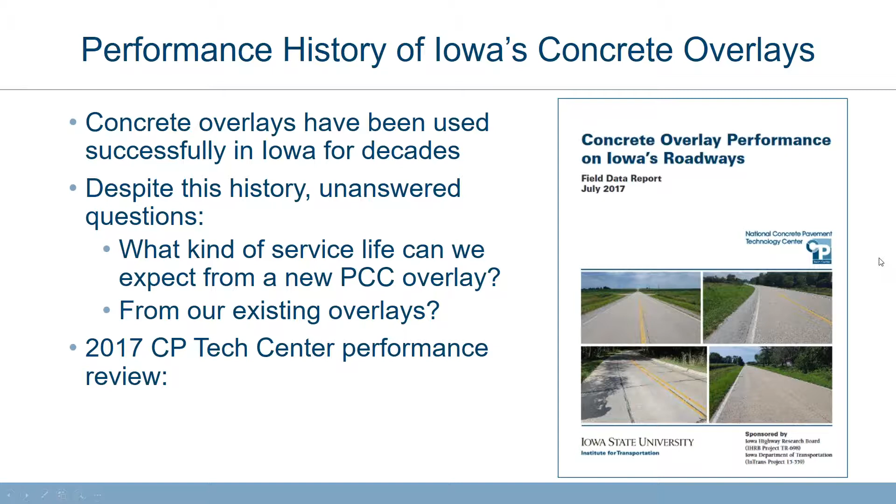So a couple of years ago, as part of the CP Tech Center Iowa Highway Research Board study, we did this research, which I'll just show a couple of slides of results from, but you can find that report on the CP Tech Center's website if you're interested in checking it out.

Iowa has really good data for its pavement condition, collected by automated vans on their local system, which is great because most of our concrete overlays here are on our local system. We were mainly characterizing pavements through a pavement condition index, which is pretty standard in a lot of places. We spent extra time analyzing smoothness as well, since smoothness is one of the most important factors for pavement performance, especially to the traveling public. And then there are a couple of other elements of that pavement condition index that we use here in Iowa.

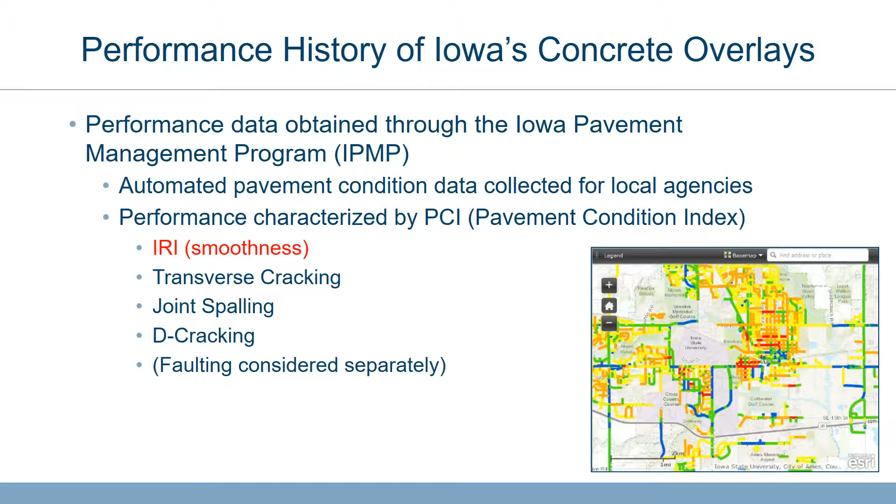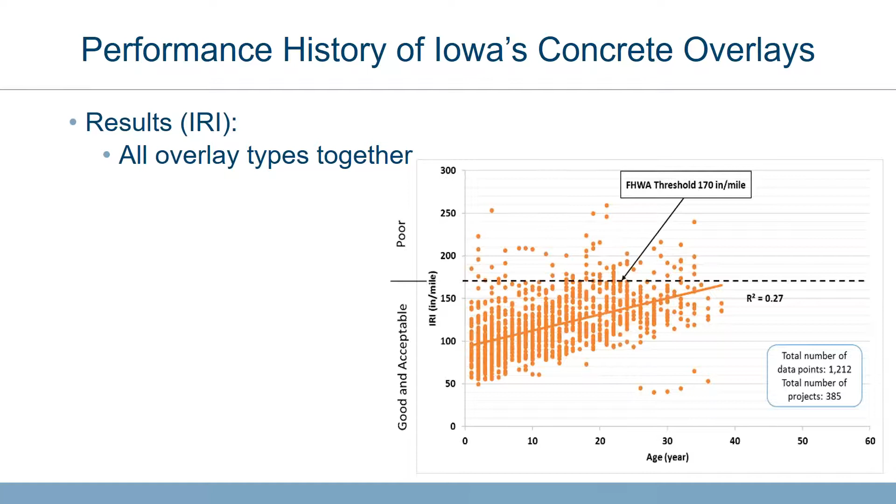And then the next slide is the IRI plot. Here it doesn't quite reach 170 inches per mile for IRI, which is one of FHWA's thresholds for when ride quality becomes unacceptable. So we were seeing, again, pretty similar results, about in that 30 to 40 year mark, with a simple trend line plotted out. Obviously you have some projects performing better than average, some worse than average, but that's where we were observing the projects that have been built in Iowa to date over the years.

So I think that is a finding that largely makes sense. And then in terms of those bonded concrete overlays of concrete, those overall were less successful, but I think in the context of what the design life expectations were, given that the expectations were relatively low for a lot of those projects, in that context, I think we found that those had performed fairly well too.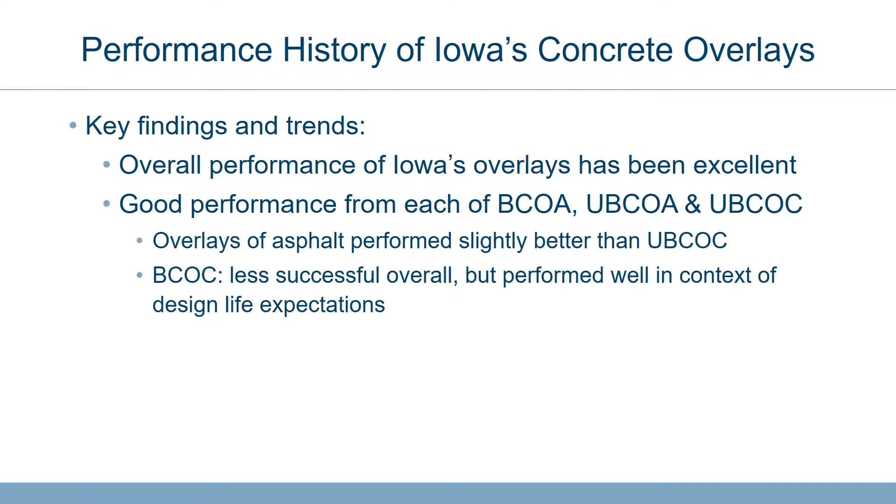In general, since a lot of these are on county highways that have very similar traffic volumes, you don't have nearly the variation that you do if you have a large data set that you're designing for, going from interstate down to divided highway, down to rural highway — a lot of these were very similar. So in general, the thicker overlays tended to perform better since they were carrying similar volumes of traffic. For the BCOA short slab designs, we had good early performance for the first generation of projects, which were at ages up to about 10 years old at the time of the study.

So that was positive to see. Not as much long-term data there, obviously, but the older designs with conventional joint spacings had performed well over longer periods of time too. And like I mentioned, traffic-wise, most of these were on low volume county highways. They'll see a decent amount of trucks as a percentage of the total traffic, but overall it's hard to find overall trends relative to traffic volume when most of the projects are in that same category.

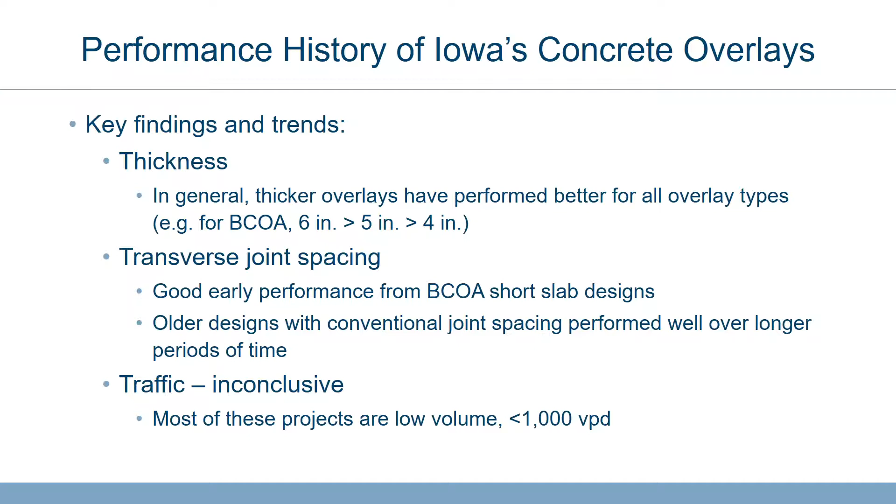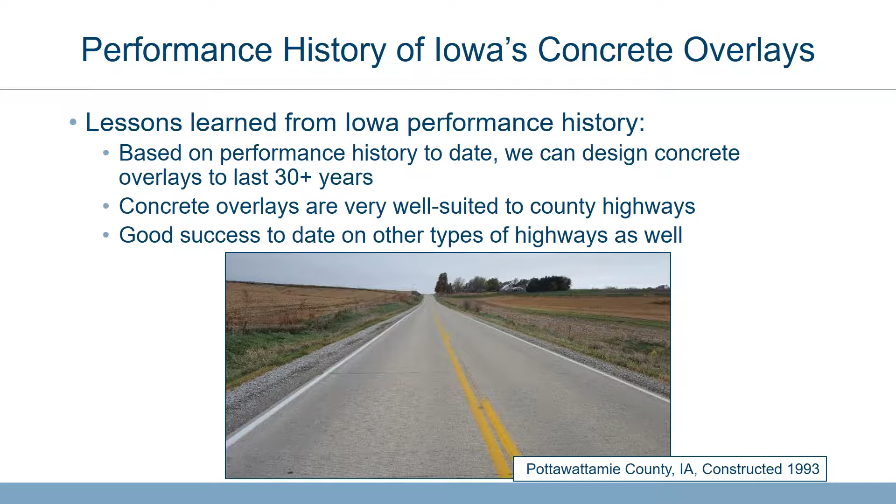So, some of the takeaways from the history and experience we've had in Iowa: your design life expectations are always going to be in the context of what type of design you use, what your existing pavement condition is, and things like that. But certainly for the types of overlays that are commonly built in Iowa, we found that we can expect those to last on the order of 30 years, and that county highways in particular are a great application for them. But where the DOT has built them in higher volume applications, and where cities in Iowa have built them out as well, we've seen good success on those projects too.

So as Peter mentioned, the goal, I think, with building or beginning to use concrete overlays as one of those tools in your toolbox from a pavement design perspective, that's what the Iowa experience has borne out over time, is that as all these agencies experimented, they got designs they began to become comfortable with, and they had a lot of experience, and obviously the base of contractors got used to building them.

It really did start to become a commonly seen thing, and we usually see probably on the order of a dozen or more different counties in Iowa each year with at least one concrete overlay project. So it's really become a regular part of the pavement network here, which is great to see.

And I think as concrete overlays see more usage in other states as well, like Peter showed that national graph of growth of projects, starting from a very small percentage of all pavements nationally up to about, I think it was 12% in recent years. In Iowa, that number has stabilized recently, probably at about 20–25%. So really that experience helps it become a regular tool in your toolbox there.

And just a quick comment here, one of the other takeaways when you do a performance history is you're plotting trend lines for these large groups of projects, but as a last lesson learned and a motivation to continue to do things better, this orange trend line you see plotted out here was for a subset of projects in the study. That gray trend line is the performance trend, including all of the dots that you see plotted out here.

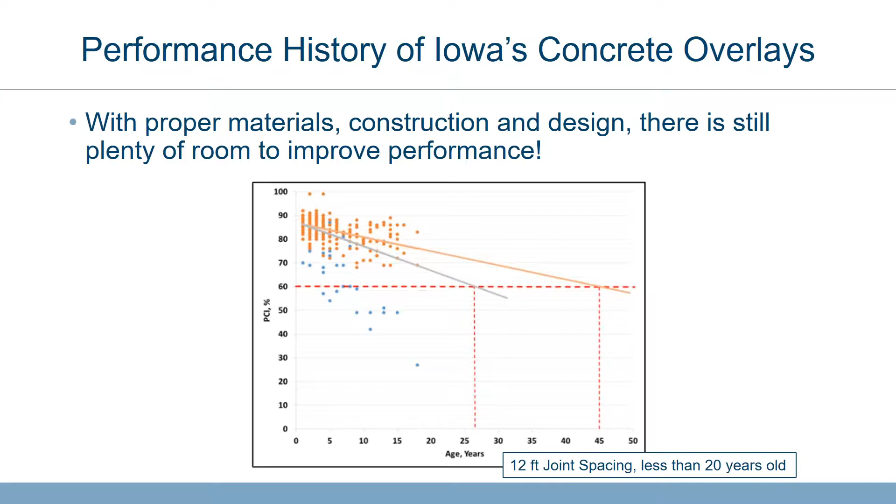So again, why do we have things like the performance engineered mixtures program? Why are we always trying to improve construction practices? You can see here, if you can eliminate those bigger problems or where things don't go as well, you would stand to see a lot of room. So a motivation to keep doing what we can do to improve our practices and design, things like that. So with that, I'll kick it back over to Peter to wrap it up.

Sorry, I was on mute.

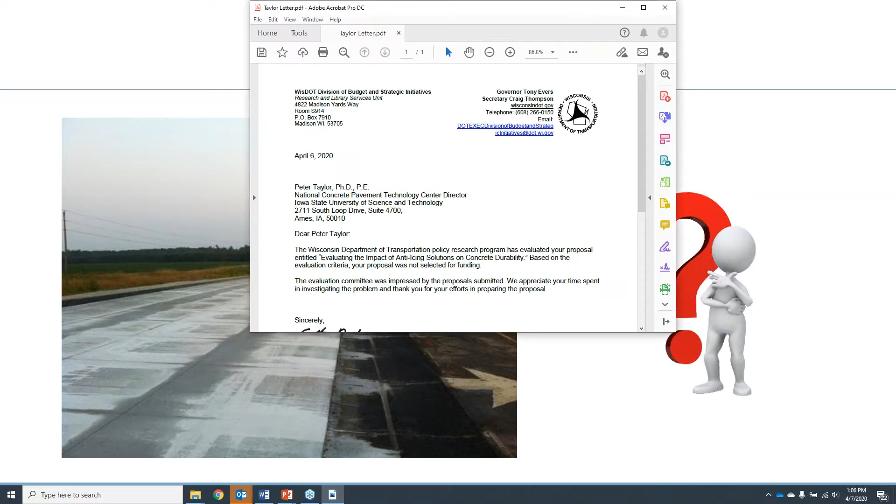Next question is residential settings in the curb line, compromise when the overlay goes over that. A lot of the curb line work that we've done has probably been more removal of that curb, but we have seen some occasions where we've gone in and done the curb treatment similar to what Peter had showed in that slide that he had. And I think in general, those have worked pretty well. Those were kind of a bonded

concept. The other thing that we have done in some instances is we've actually gone in and milled down in that curb and gutter zone, so that we could just butt the overlay into the side of the existing curb, and we've had pretty good success with that as far as the projects that I've been involved with over a number of years. So, okay.

Bear with me for a minute, as I'm having trouble trying to get this opened up so I can see it very well. All right, here's the next one.

If asphalt pavement shows signs of stripping, how should this be considered in choosing a bonded or an unbonded overlay? My answer to that, and I'll see if Peter wants to add to it, is that if you see a significant amount of stripping in that existing asphalt layer, and you would like to depend a little more on the bonded aspect of the overlay, you probably would have to see if that was just lift oriented. If it were just the lift, we might want to take that lift off.